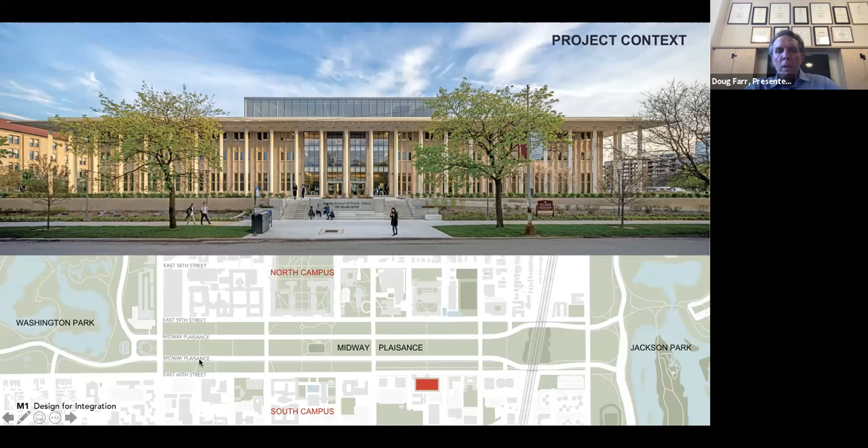There's a lot of construction going on in the South Campus. So when you next come to town, we'll walk you around. But here, just to orient you, here's the Midway. The view we just took was a drone view looking east. Here's the Keller Center, and the Midway, connecting Washington Park and Jackson Park.

And incidentally, there's a great architectural history here. Eero Saarinen, for those fans of mid-century architecture, who was based in Michigan, was hired by the university in the late 50s, early 60s to be acting campus architect, and in turn hired himself, Mies van der Rohe, and Edward Durell Stone, each to design a building on the South Campus. So here's the one we were working with.

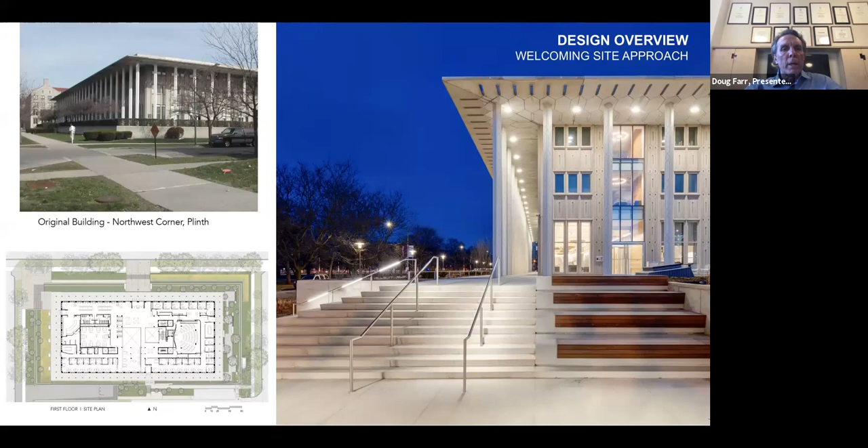Pretty cool — the building sits up on a plinth, and the innovation made sense in India because they parked cars underneath it. If you've ever been to a hot climate and left a car out in the sun, you can absolutely burn yourself — that was the Indian precedent, having parking underneath. We just got a plinth.

But we made something out of it by retrofitting landscape on both the east and west ends. These little gardens are really quite charming. Here's the discharge point I showed you a minute ago — the formal front entry is to our right here, and here's the discharge.

In heavy rain events, there is an overflow, and it's really quite lovely. You have this instinct when it's raining to step outside and take a look at it because it's a little waterfall.

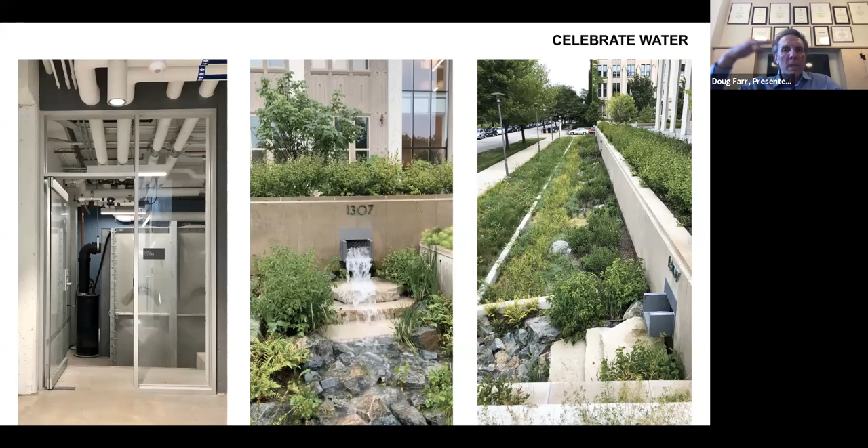So here's our 15,000 gallon cistern. We have a room labeled cistern room. It's not much to look at. We had hoped to do a float valve, but that just didn't happen, so we could sort of see what the magnitude of water volume was at any given point.

So here's the construction. Couple things I wanted to say about it. It's a monolithic concrete pour. It is fireproof, type 1 fireproof construction—good luck lighting it on fire. And it floats on a 4-foot deep mat slab, so the slab overshoots the building by about 10 feet in all directions, and the building just floats on that.

The water table here fluctuates based on the winds of Lake Michigan, as shallow as 5 feet and as deep as 9 feet, something like that. So the lower level of the building is actually below the water table. It floats in a bathtub, not unlike the World Trade Center of yore. But anyway, fully fireproof construction, hold that thought.

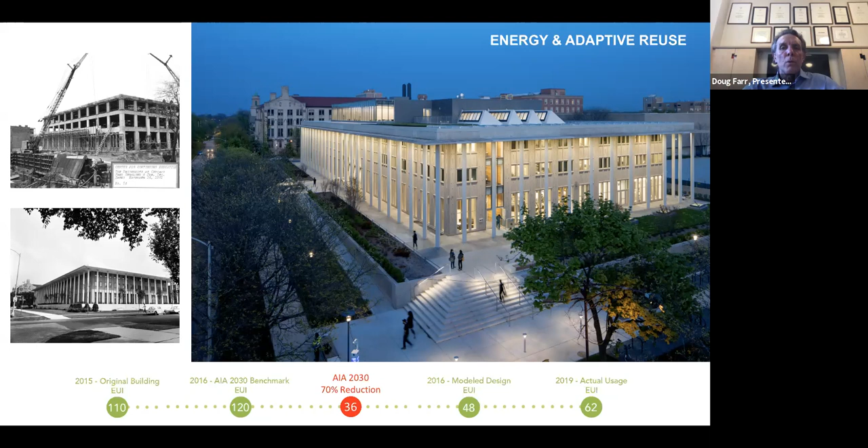So the building facade was true limestone. This is the detail for before—exterior is top, interior is bottom. These are actual hexagonal limestone mullions, you see them here in the photograph. We wrapped them with insulation on the inside, and then we installed storm windows on the inside.

So to Alicia's comment about innovation and preservation, to make this mid-century building work from an energy standpoint, we really had to super think it. And frankly, because the facade was so important to the story and the architect's statement here, all of the work was done from the interior.

The top image here is also an infrared image of the facade, and you can see how effective limestone is at communicating or transferring heat from the indoors to the outdoors. If you've not played around with an infrared camera, you can get them now for your iPhone for about $200—please do that as campus architects, walk around in the cold weather and take pictures, and you'll know what building to renovate next. Above is the before and below is the after; the red colors indicate heat loss, a concern, and the blue colors indicate an absence of heat loss.

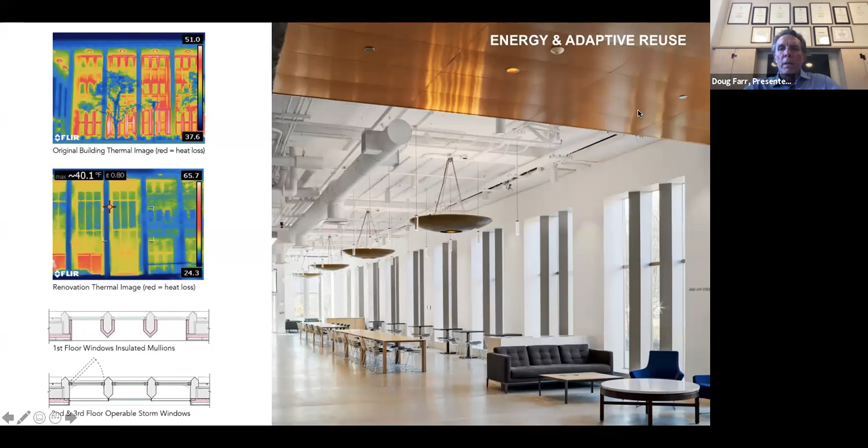In the foreground here, you'll see at the ceiling our radiant heating and cooling panels, one of the great innovations we installed in the building. It is much more efficient to transfer heat and cold throughout a building using liquid more so than air—it's 40% more energy efficient to transfer heat via liquid, and we were able to get a beautiful, lustrous copper finish in public areas where that was important.

So here's two sections of the building. The upper image there is a section east-west, so it's quite a battleship of a building—not quite the size of a soccer field. When Stone opened it in 1963, there were literally only windows at the edges, no natural light. It's about 150 feet wide and 270 feet long, something like that, no natural light.

But in studying his oeuvre complete, what we found was there were vestiges in this section of the embassy he had designed in Delhi. Let me point them out to you. There was that large central space, the one that only had natural light at the door, was a two-story space here—that is a double height volume. If you look up here and here, you'll also see two additional double height volumes.

In his original design, he was thinking they would be skylit atria. He hired a Chicago mechanical engineer who said don't do that here, so he didn't, and just roofed them over. It was kind of silly and a missed opportunity, but needless to say, we saw them for their potential, and those became some of the most exciting spaces in the Keller Center—this is the Harris Family Forum, and these are the two light courts, sky courts east and west.

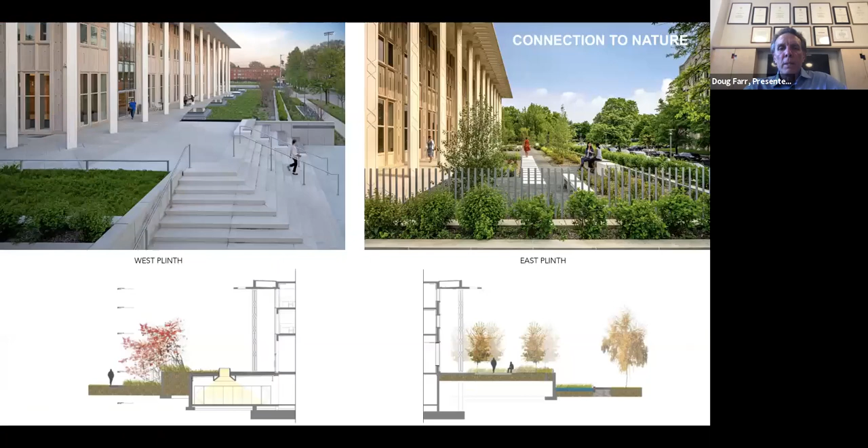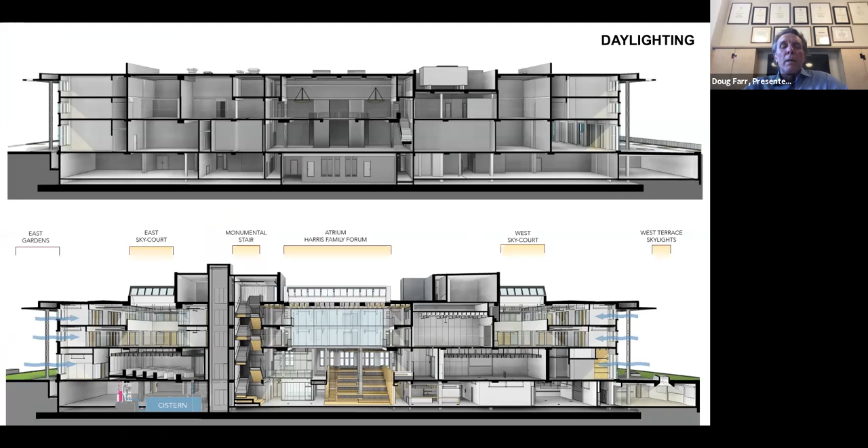But I think it triggered a good kind of conversation between the university and the neighborhood, saying please don't expand anymore if you can. But the building itself reflected a kind of walling off, with the primary entrance from the north, and the core placed immediately to the south, so that you would only enter from the north, spin around, do your business, and exit to the north.

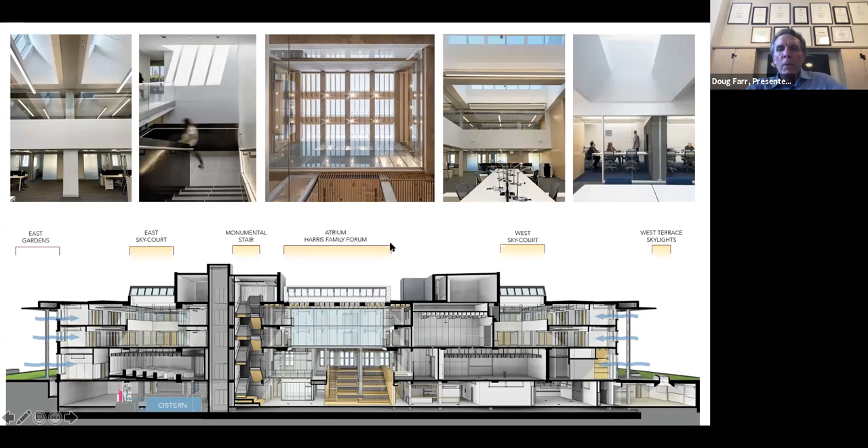There was no facility for you to actually continue through the building and walk south to the neighborhood. So this is the section retained on the lower level, and these are the kind of spaces we've created: the Sky Courts east and west, the Harris Forum in the middle, and the Grand Stair there on the right. I'll show you all those things again.

We took different attitudes in each of the spaces. First thing to say is that the dean in office when we were designing this was a gentleman named Daniel Diermeier, who really was a brilliant dean, went on to become provost, and now is president of Vanderbilt University. He really had a vision for this, and I credit him as a person who was willing to explore innovations in ways I hadn't seen before. Great credit to Daniel for his work.

One of the things he urged us to do in the design, he said, 'Doug, when students come in here, first of all, no one knows what we do. We're a very quantitative school.' So the first year of the public policy master's program is really learning problem sets and linear regressions. And these are poor kids in windowless rooms, working on laptops and whiteboards and the whole thing.

He said, 'But it's interesting when you see people doing it. So Doug, when visitors come to our building, I want them to be able to see the veins popping on the necks of the students working their problem sets.' So this became a transparent kind of gallery, being able to see up into team rooms, work rooms, seminar rooms, and so on, and see all the comings and goings.

So this is the Harris Forum, and I'll show it to you a couple other times. The point here is we chose to have our new skylights face south, with the intention that light would penetrate down in shafts — as an architect you might think you weren't doing your job because you've allowed glare to happen. In this case, we thought it was the opposite.

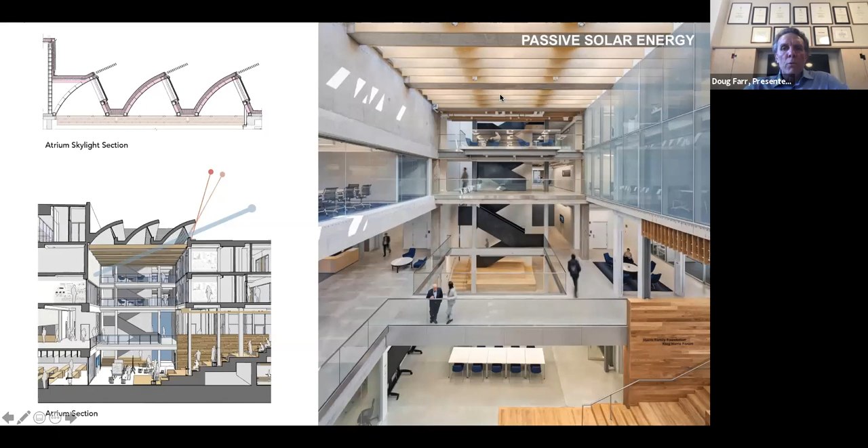And here it is again, and this goes back to that obesity trend. One of the collaborators for our book, Sustainable Nation, was Dick Jackson, who used to be at the Centers for Disease Control, a leading public health official in terms of obesity prevention. His finding is basically that people who climb 20 flights of stairs a week have a 20% reduced chance of heart disease and other chronic conditions.

So making the stair attractive and making it the default vertical circulation was the game we were playing here. There is an elevator, a passenger elevator — if you can see in this image, the two kids sitting there by that dark wall, the elevator is tucked behind the wall.

So it is part of the decision architecture to make the stair prominent and fun and celebrated, and to sort of tuck the elevator away, making it accessible — it needs to be convenient for people who need it, but most people don't — and to make the stair the default. We believe this is the manifestation of good public health policy in the building.

And just one other prickly anecdote, which bugs the bejesus out of me — let's see if I have it. Yeah, here we go.

So the building codes are really mismatched with the challenges we face. Chicago burned down in 1871, and it still has repercussions in our building code, which is very conservative when it comes to fire-rated assemblies and so on.

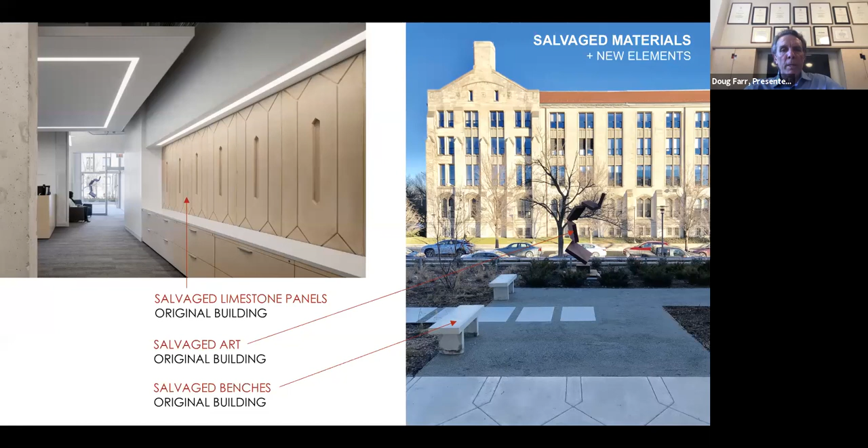Another one of our social innovations we're really proud of, but is kind of a half measure, is all gender adaptable restrooms. So we laid out, you can see here, a couple things.

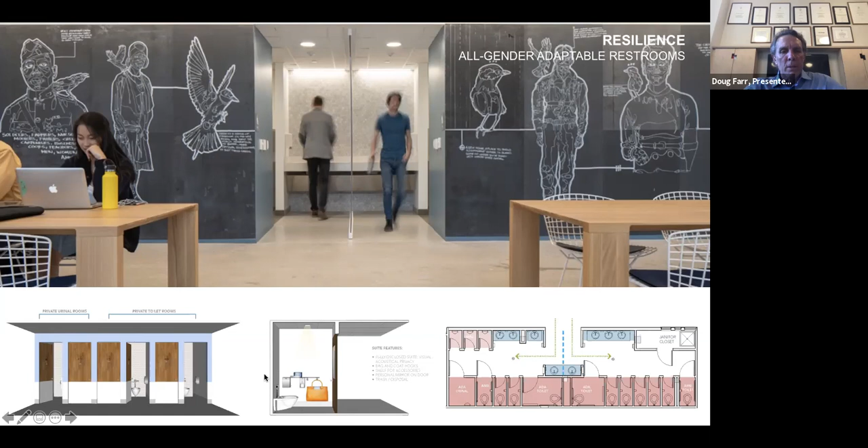But what we wanted was, once you're out of your compartment, the ability to circulate freely and wash your hands in common areas. Everything was code acceptable up until the point where males and females, or different genders, would wash their hands together. This ran afoul of the Illinois Plumbing Code as interpreted by City of Chicago plumbing inspectors. It was one of the most fascinating meetings — I wish we had recorded it — full of ancient theories of perceived threat, all done to protect the women who would supposedly be assaulted in a blended gender bathroom context. Also, the doors for the bathroom stalls were salvaged from the building before.

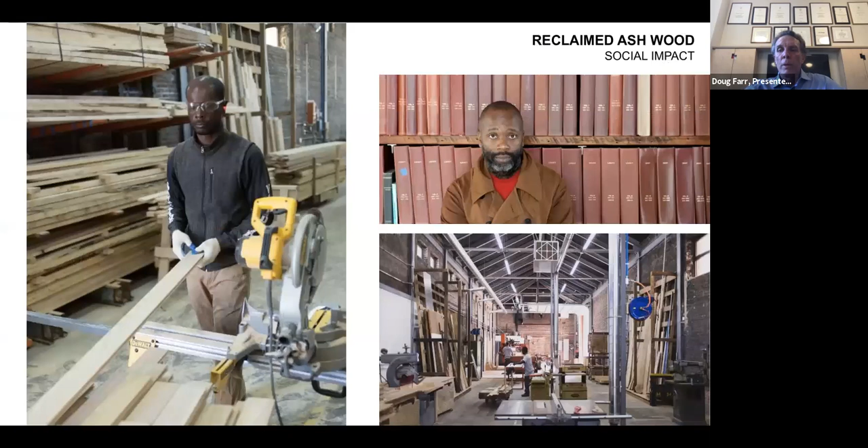So there you go — here's the forum. Just lovely, it is every bit the success we'd aimed for. It allows extroverts, introverts, quiet and gregarious people, performers, librarians, and so on, to all find their perfect habitat, if you will. The most powerful collaboration is probably this one.

The gentleman on the upper right is a Chicago artist and Harris faculty member, Theaster Gates, an amazing artist, machine, art producer, marketer, and so on. We sat down — the dean had brought Theaster in — and laid out what we were doing in terms of wanting a building that was healthy and used salvage materials. He said the City of Chicago had suffered an emerald ash borer attack 10 or 15 years ago, where a lot of ash trees were eaten by the infestation. The city cut those trees down and stockpiled them, and somehow Theaster got hold of them. He said, 'I've got these trees, there's no bugs in them anymore, they're all dead, but I've been wanting to start up a lumber shop, a kind of sawmill.' So we said, well, we'll be your first client. All the wood you see in the Keller Center came through emerald ash borer trees, milled by community workers in Theaster's lumber mill.

So, totally cool. Again, here you have what's become a little ubiquitous, this sort of terraced, stadium seating. A couple things I'm proud of here: you can see the level of millwork finish — Theaster's group didn't do the finishes, but they provided the raw wood, and it was detailed beautifully. I'm also proud that we were able to get just one-side handrails down here so the space feels much more open than it would have.

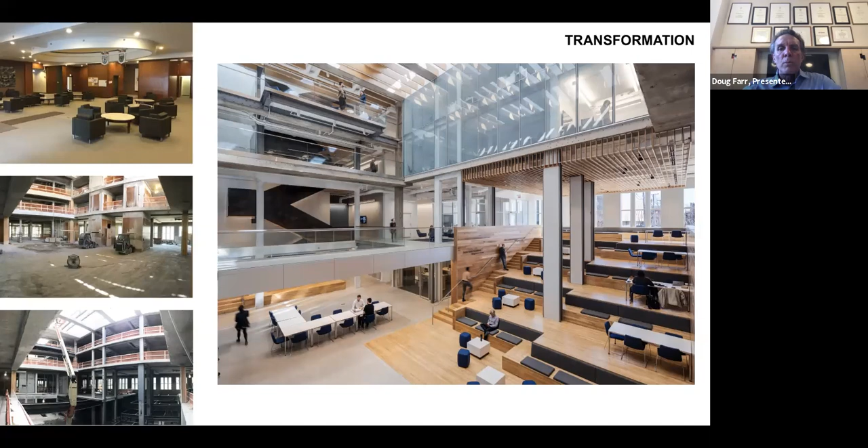So anyway, in other innovations, bird-friendly glass. It's the coolest glass because you can't tell it's bird-friendly until you're right up on it. We'll talk about this in a minute, but here's all of our policy innovations.

We set aside about half of the roof for photovoltaic panels, and they generate 11% of the building's energy. We did not fill the roof, and did so intentionally. One, we kind of ran out of money at the time, but we thought this would be a natural donation platform for alumni, the class of 20, the class of 21.

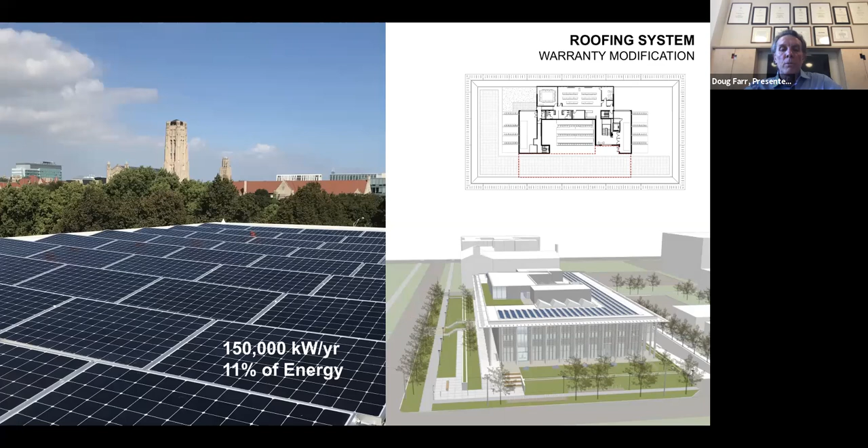What are we going to write a check for? So we've already made the connection to say, just buy the solar panels and finish the roof. Once the roof is fully populated with solar panels, they would generate 24% of the building's electricity. So here's a commanding view from that top floor, looking back towards the central campus and Rockefeller Chapel.

Flexible seating, flexible walls, all that kind of stuff. And again, you can see here the radiant heating and cooling panel. Cooling is done here also with radiant systems, projection screens. So you can use the space in a variety of ways.

So again, before and after: madmen in the upper left, white guys in suits drinking cocktails, and then the newly transformed space, lying on your back looking straight up at the ceiling of the Keller Forum.

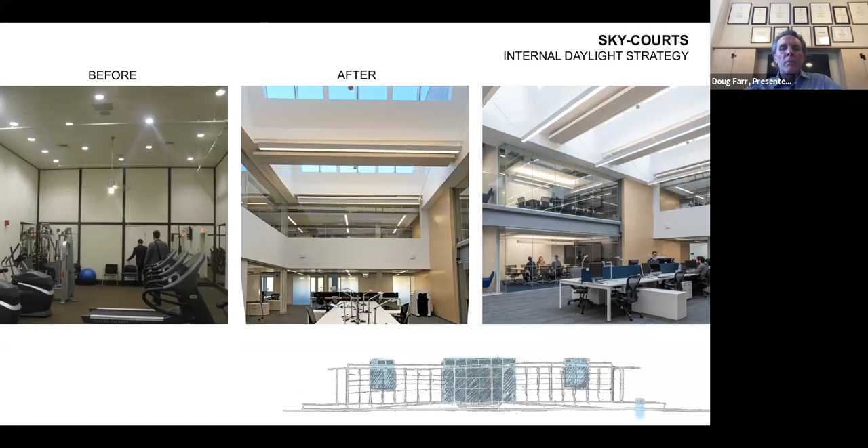So again, the light courts on the left and right sides, the before here, the after. In this case, we cut the skylights to face north for a glare-free kind of ambient light that works well with computer screens. Here's what a typical floor looks like.

We've got very generous windows in the corner, insulated, these don't seem to have their storms on them. But anyway, here's the kind of perimeter zone of admin folks sitting out in the open, and then private offices to the interior.

Here's our bird glass. If you look really closely, there's a kind of spiderwebby feeling looking thing there. And then again, here's that motif of the geometric ornamentation on the columns.

Some natural light that we were able to sneak into the top of the plinth at the two ends. And then just the building plans. Here's the site plan done by Site Design Inc.

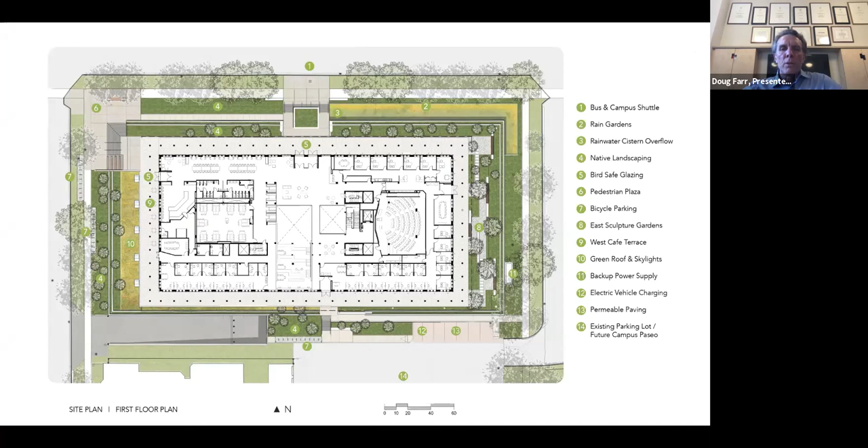We were able to take the coaching from Saarinen, which was clearly to do an object building with large setbacks. So we took best advantage of them. And then here's our moves in terms of cutting into the building and introducing natural light in yellow.

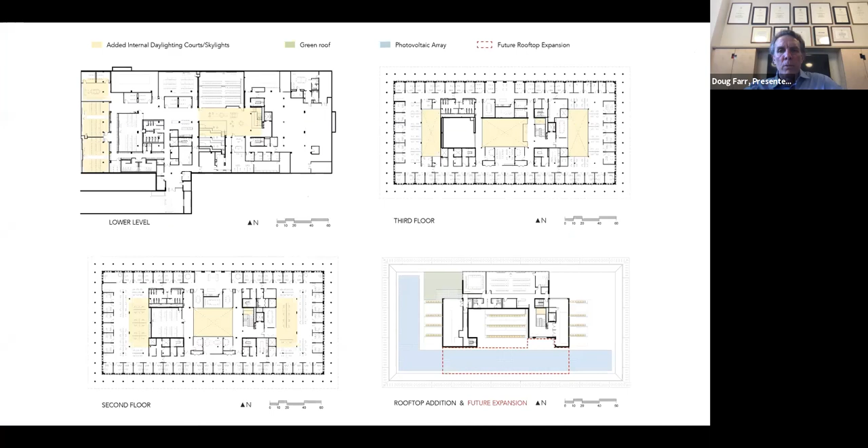So I think we're about done. This is just closer to kind of put it in mind. This is the Ed Stone building in Delhi, India. You can see the slender columns, the lattice facade.

And by the way, there were no windows there, so the breeze would go right through the building. There was an interior court. And this was his translation 9 years later in Chicago.

And you can see it doesn't fit quite as well, and this was just perverse in the day. So when he was told not to put skylights in it, what he did was one of these light ceilings. It's like 200-foot candles.

It's fluorescent tubes at 4-inch centers, and the thing was just broken and unfunctional at the time. But there was a time when human beings thought that fluorescent lighting was superior to daylight. So anyway, we fixed all that, and look forward to your questions.

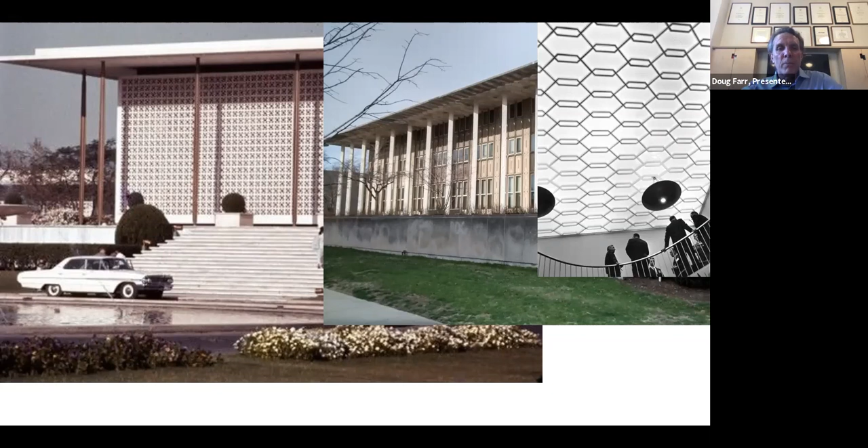Round of applause, emoji applause, mute applause.

But it was originally your idea, right, that you ran by her? Oh yeah, we wanted to do it, but who's the woman? She was a big Pittsburgh Penguin fan. Yeah, remember? I can't remember her name, but that's interesting. She was a character. But anyway, she's like, oh, I'm into that too. Yeah, we'll get that into the contract. It's like, okay, this is how it works. You know, I really like this.

I think it's interesting that you lumped that conversation in with the restrooms, because it was determined by the university that taking an advocacy position with the state and the city on gender neutral, all-gender restrooms would be a political statement. So we have a commitment to never getting involved in politics. There was a report chaired by a law school faculty member called the Kalven Report, and it governs that. For example, we won't use our endowment to invest in sustainability, because that's also taking a political statement. We're very rigorous in applying this Kalven Report. So I think the Living Building Challenge was not really a political statement, and I'm glad you snuck that in.

I think that's great. So it sounds like it got kind of snuck in there. But follow up to that question is, what about the costs that might be tied to that building?

Great question. I'll start with fees, then talk about perceived construction cost premiums, then benefits. For fees, we added between $150,000 and $200,000 to do this, including two consultants: one was the primary vetting agent that took all the MSDS sheets for the products and vetted them, and the other was a sub-consultant chemist who would weigh in when they came across something they didn't understand.

He was an incredible client. Facilities services can't - I'm sure in many of our institutions, if not all, the academic side of the house really leads the aspirational aspects of these projects. So to have him there saying, no, this is something we can't compromise on, we're going to compromise on something else - for example, this building has the smallest faculty offices on campus at 120 square feet, which he had to lead very strongly on. Even that rooftop addition was made as small as possible, both from a preservation perspective and a cost perspective.

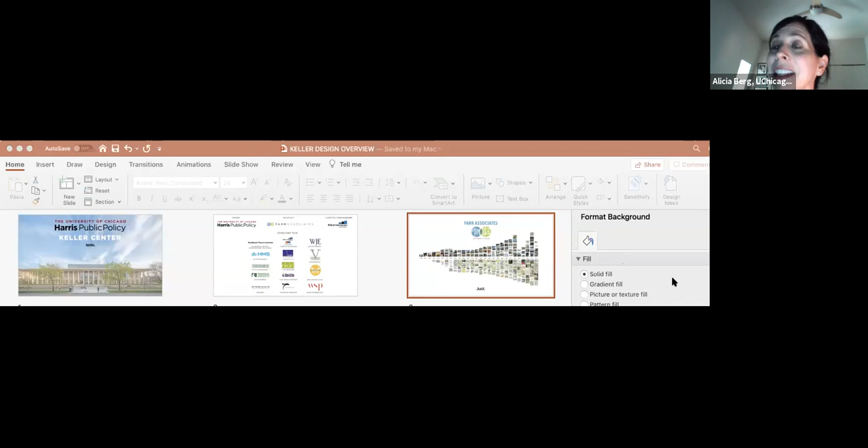So I think there's always trade-offs, and luckily in this project, sustainability won the day.

Wonderful, thank you. I have a next question here regarding the bird-friendly glass: what portion of the Keller Center's windows has bird-friendly glass?

The building had 10-year-old windows when we were doing our work, and we looked at the efficacy of replacing them with newer windows to get higher performance, and it didn't make sense. It made a lot more sense to add interior storms because they would insulate the occupant from those limestone mullions, so we didn't get all new windows. The only bird-friendly glass is in the larger spandrel panels - the 4 central bays where we removed the limestone and spandrels - as well as the executive training center on the top floor.

It's a couple of glasses - this is a German glass, and I want to say it was like 2.5 times the cost of regular glass at the time. It's coming down a lot - it was pretty exotic at the time. We're looking at it for our first full LBC project now, and the bird glass has dropped in price a lot.

Great, yeah, thank you Doug. So outside of natural lighting and accessible staircases, what are other ways we should be thinking about incorporating human health and wellness into building strategy and design?

Great question. So we didn't design the building to be perceived as COVID friendly, but a couple things make it that way. One is the windows open - this is one of the biggest fights, and I'll just say, dig in your heels and don't let the mechanical engineer or architect convince you that you should have inoperable windows. In the Keller Center, everyone can go into their postage-stamp-sized 120 square foot office but open their window. So if you're a little hot, a little cold, or just want to breathe, you can do that. It's good for COVID.

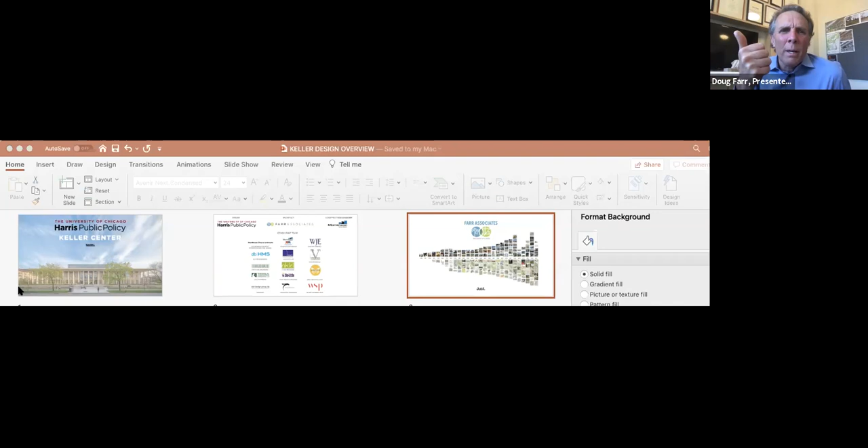So you could justify doing it because it's not that many years, and you could probably get better performance overall. But in terms of the story about the south side of the Midway and the mid-century portfolio of the university, there's a Mies, there's a Saarinen, and there's a Stone - that's a richness we couldn't have gotten with a new building. So if anyone's got it, find the ugly duckling, buy the infrared camera attachment for your iPhone and send me the pictures of how bad it is. And then a couple of those layers of it's really ugly, it sucks at energy, no one wants to be in it - that's your project.